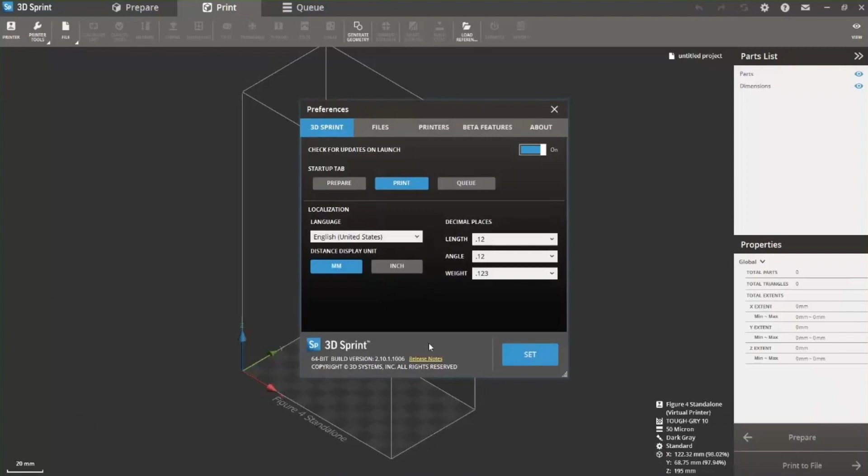That's your software version. If you ever have to make a call, your 3D Systems service representative is going to ask you what version you're using, so that's something you want to have handy. There are other defaults in here that can be set up as well.

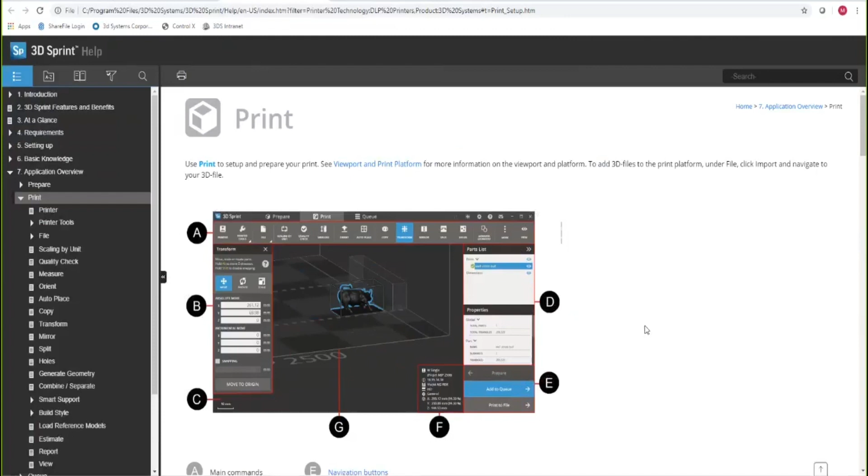Next is a question mark, and anywhere there's a question mark, I would click on it in this system. The question mark takes you to help, with quick links to help online, and it's pop-up help. So if I've got two screens, I can look at my help and still be doing things on 3D Sprint at the same time, with a couple of monitors. It's a really nice tool to not have to keep all of that in one place.

When you go in and click on that help, this particular help on the main screen in the top right, you'll see a lot of the things we're going to talk through here. This will label out and tell you navigation buttons, command panels. You can go through the commands and you'll see each one of the icons on the panel, and you'll see what they do.

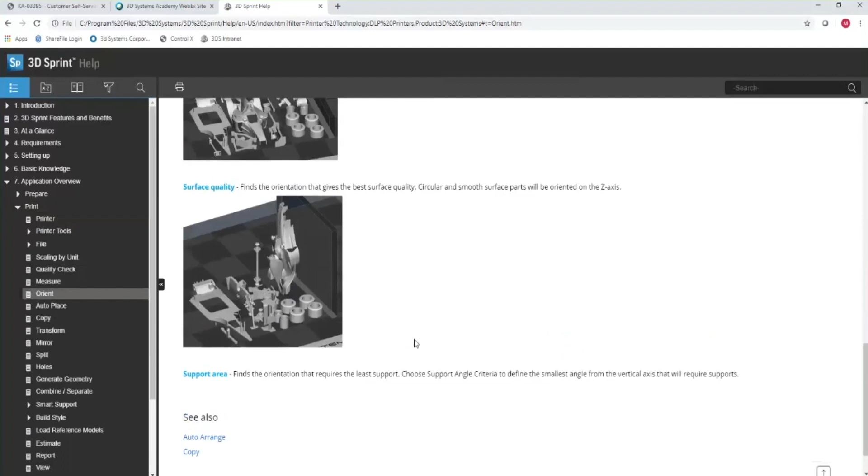For instance, if we click on Orient, there'll be a video in there of how to use that particular icon. There's going to be terms, definitions, and any other information you'll need to know what to do with that icon and what it's available for. You'll see that for just about all of the icons there, there should be some kind of help. And then there's extra information here on selecting parts, navigation tools, and things like that.

So again, this is the help button that's up on the right. A lot of useful information. If somebody's first starting out with 3D Sprint, I would suggest they click on that and just take a little stroll through and see what's available there.

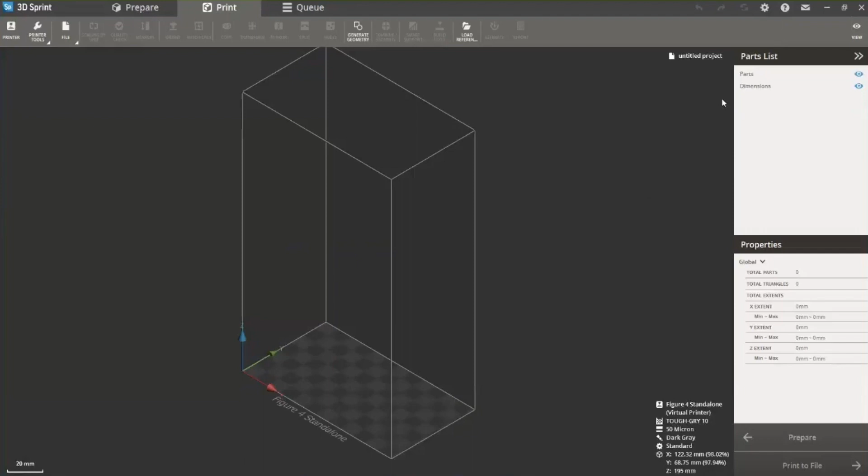The next place we're going to go is the parts list. The parts list and properties are here on the right-hand side, and let's open a part and give you an idea of what that looks like.

We'll just bring a part in here. This part's in, it's got blue on the outside. That means it's within our boundaries, we should be in pretty good shape. You see a green check mark, that means the part is verified.

We can go down to the properties. In the properties, you'll see this: the name of your part, how many triangles your part has from the STL file. You can get volume and surface area information, and also important are your extents.

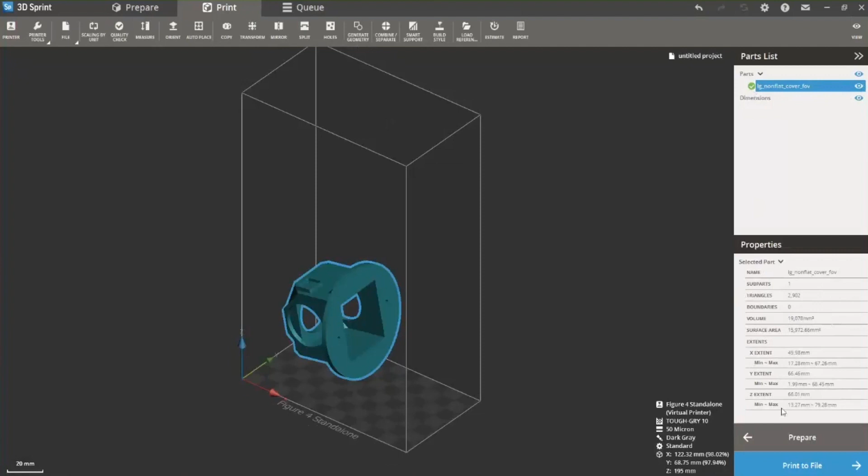Now note your Z extent, this extent starts at 13.27 millimeters. So this is telling you the extent of your part. But there's also 79.28 millimeters, which is the maximum height of this part or print in the way it's oriented right now. If you reorient that, of course, that's going to move.

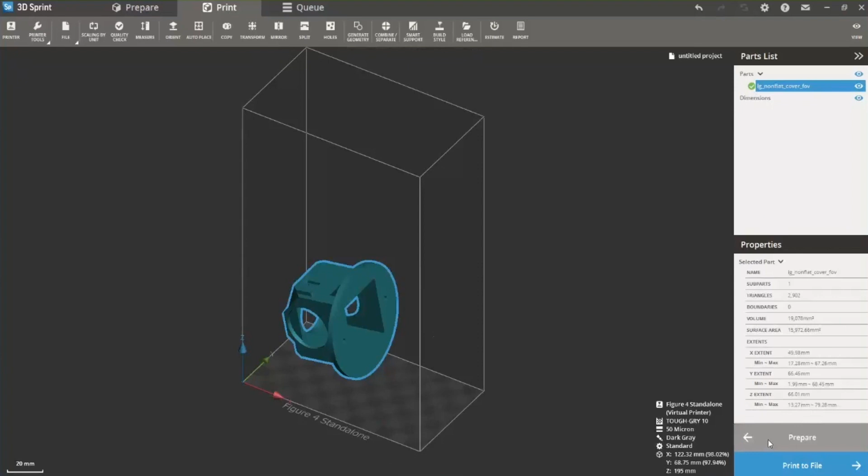Also on the bottom right, you've got your Prepare tab, where you can go to the Prepare tab. We'll go back to the Print tab, and we'll touch base on the Prepare tab in a minute so you can see where some of the functions are there. This is where you prepare your file, go print the file, slice it, and it will execute the print based on your setup.

Also at the bottom right is your active setup information. This is running a virtual printer of the Figure 4 standalone, which means I did not select a specific printer to slice my part. It's got Tough Gray 10 material selected at 50 micron layer thickness. It's in standard mode. You'll see the XYZ configuration and there's a percent here.

The reason that's not 100 is that in your default modes for each material, your setup in 3D Sprint will take into consideration your scale factors. So what that means is if you have different shrink and scale factors for different materials, you won't set your part up outside the boundary. It's going to do that adjustment for you, and it's a really nice tool to have, especially when you're putting a lot of parts on a platform.

And then we're going to go up here to the Printer tab. One thing about this Print tab, this is your main working space. I would say for a customer, this is your portal to the customer right here.

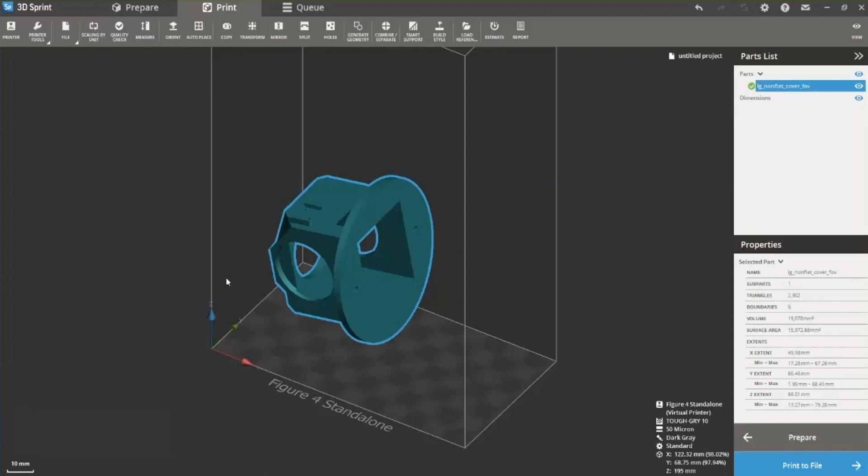You've got your help menus. This is where you're doing all your manipulation, your setup, your part handling, whatever you need to do. That's done in this particular tab.

If I go to the Printer tab, you'll see it also has a help button. If I go to the right and click on the help button, there's a video that takes you through some different things. It'll go through in detail some of the items we're going to talk about and highlight. You'll see that in the Printer tab, terms and definitions, things like that, all will be here.

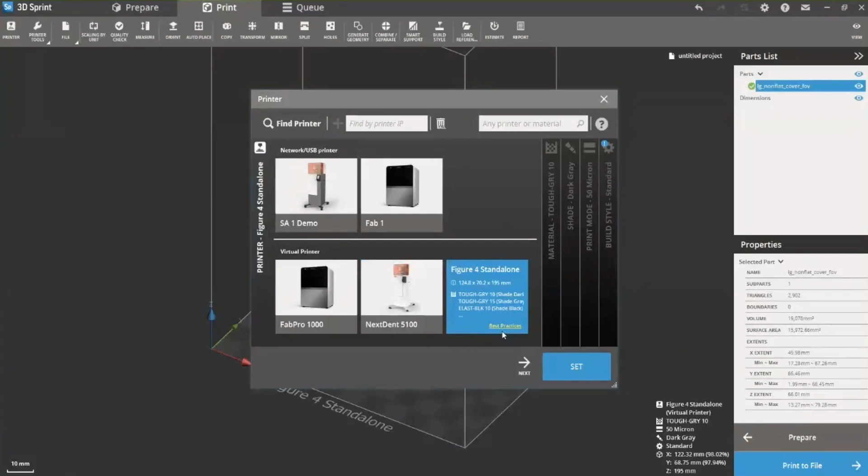Another thing in the Printer tab is there's hot links within the tab itself. When I drag my cursor over a machine, I'll see in yellow best practices. Whenever you see a highlighted best practices tab, it's worth clicking on it. For the standalone printer, I'll go here and click on this best practices, and it's going to be a hot link. This takes me to the user guide.

This takes me to a quick reference guide. There's some things on 3D Sprint. A lot of useful information at the hot links, and this is for the printer.

Once I select my printer, if I go to the material - and we talked about this before - this hot link is really going to be your friend. We'll just choose Elast Black 10 and click on the best practices hot link. It's going to take me to a table for this material, and it has all the materials for the printer in there, but it's going to go to that spot on the table and have some tips.

This one talks about using orientation to minimize large cross-sectional areas. For full platforms, print quality is best in premium mode, or slow down the interval pause time to add that to 1 or 2 seconds.

You're going to get some information here for each of these. There'll be some things, again, there's another caution about do not press down on the film when stirring for things that need to be stirred.

In addition, there's more videos that are available for best practices and how to set up parts. They'll be real similar to the things we discussed today. There's a place where you can go in - we got rejected on the link there - for our best practices that you could go in and print out, that will talk about handling cross-sectional areas and some of the things we'll discuss today as well.

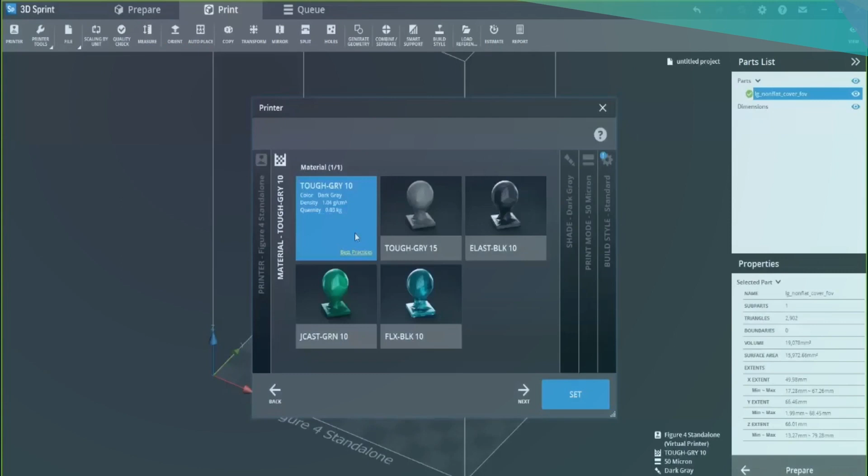And lastly, you'll have part curing time, and that will vary based on your material. The tough gray 10 suggests 60 minutes, 90 minutes for the tough gray 15, or 45 for the Elast black 10. And again, these are in the LC-3DPrint Box that we sell for curing parts. So a lot of information here, found by clicking on your best practices hot link for your material. If there are multiple colors available for that material, that will be found here.

And if you go to your print mode down here, you're going to see highlighted in yellow, it says default. What default means is a couple of things: this is the best combination we found for print quality and speed, so we try to balance those out, and that's where we start. You'll see in the build styles in a minute, there'll be other things under advanced modes, but as a start, this is what you'll see in the default. So if you see claims on print speeds, throughputs, and accuracies, they're done at the default mode that you see here.

This particular material has 10, 20, 30, 40, and 50 micron layer thicknesses. That may not be the case for all materials. The Flex Black 10, for example, is only 30, 50, and 100. So it's dependent on the material.

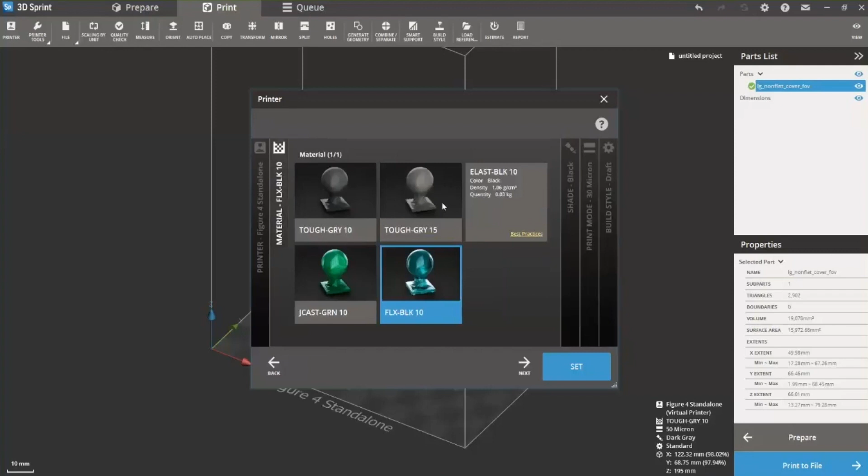Let's go back to our Tough Gray 10 and go to standard mode. Standard mode is default for your Tough Gray 10 again. Most things are set up for defaults will be in your standard mode.

Now let's talk about the difference. Most materials will have draft, standard, and premium modes. Your draft mode is, of course, going to be a high-speed mode, and it's pretty good print quality. But it's something you use when you want a fast print, just to check it out. It's a prototype - let's blast it out and see how it looks.

If I go to standard mode, that's an intermediate speed with great print quality. Again, this is where we balance speed versus print quality. If you go to premium mode, that's a moderate speed, but this is your best print quality.

The times you would use premium mode are a couple places that will help you. If you've got large cross-sectional areas, which we'll talk about more in a little bit, you'll probably want to go to premium mode because it allows your material to refresh a little bit better. If you've got a lot of different parts, say a full platform of parts that are 20 millimeter diameters, you may want to print that in premium mode as well, so you get a really good refresh rate on your material as you go through.

It just depends on your intent, your application, and what you set up. You may find that in draft, standard, or even premium, you may not see a big difference in your part. But there are cases where you'll really see the difference. Features and things like that from draft to standard, you should see a difference as well, but really want to consider that. In premium mode, again, if you have large cross-sectional areas or a really full platform, you might want to consider using premium mode.

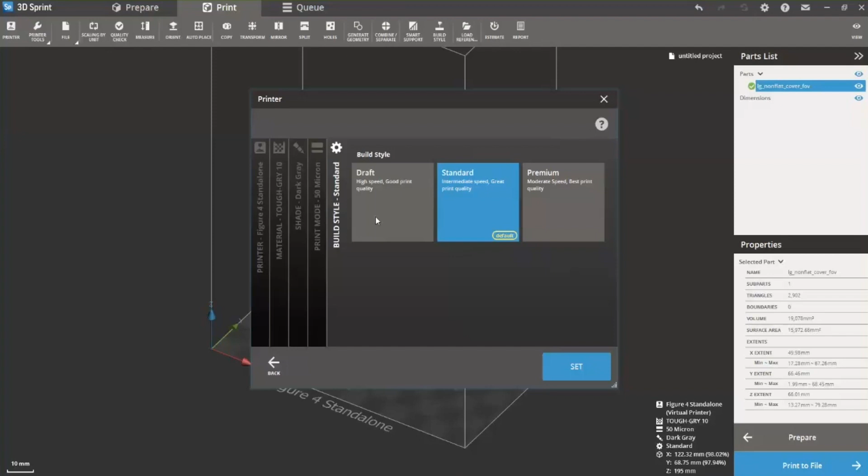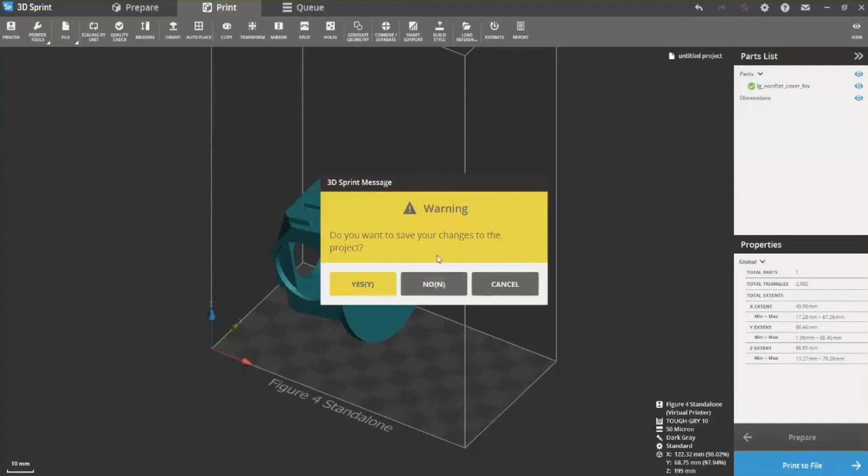So let's set that, and we'll go back up to our toolbar and go to the file. This is where you can save as, or close 3D Sprint files. You can also import and export STL files as we did, and of course you can close your part here as well. Let's just close this part. Do you want to save your changes? No, we won't save this one this time.

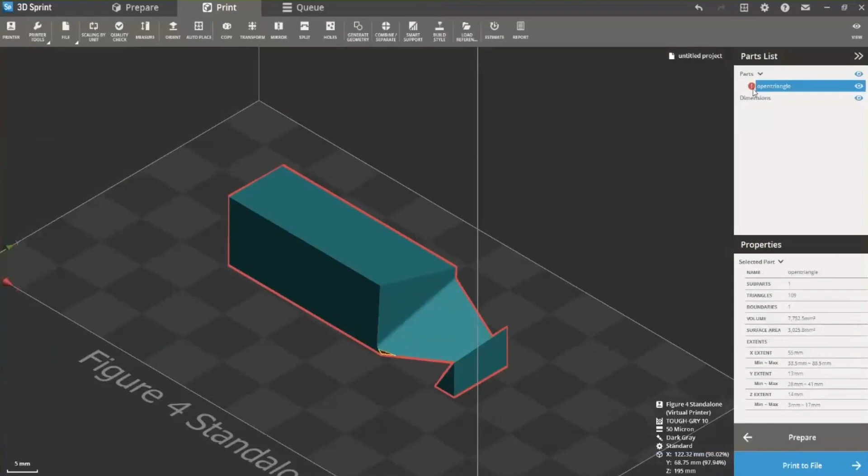Now I'm going to bring back in another part, and we'll go to auto place and set that in. Now this part is highlighted with a red border, and up here at the top right it's got an exclamation mark. If I mouse over it, it says the part contains open boundaries. So I'm going to want to fix this part before I print it, because I'm going to have some problems if I don't. Let's go to the Prepare tab, and I can already see there's a triangle missing here, highlighted in yellow. I want to try to fix that.

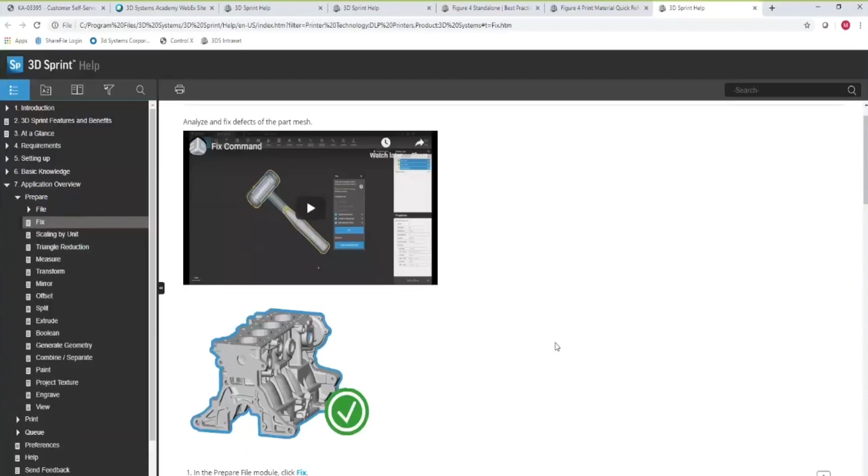So let's go to the Fix icon. The Fix icon has a question mark - if I want help on what that means, there's a video that will pop up and tell me what I see when I see purple or yellow in my part. It will give me a definition of terms and let me know everything I need to know about the Fix icon. For this particular one, there's one open boundary, and there's also some self-intersections with triangles that you can see in purple. So let's just fix that.

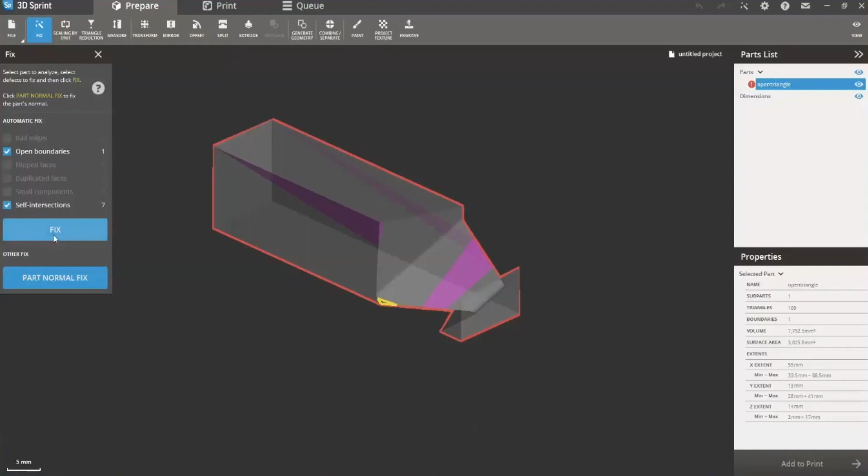You can see that was really fast because that was a really simple fix. Some parts may not have that, but if you have scan data, you're going to run into this a lot more. I would always bring a scan part in here and take that out, because a lot of times scan data will have a lot of noise shells, open boundaries, and self-intersections.

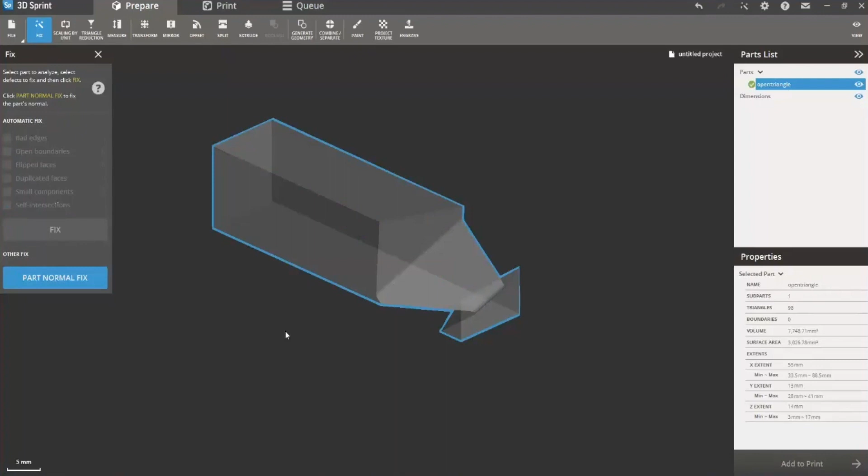So this particular part was a CAD file that just happened to have an open boundary, and you can see that it fixed that, and now it's highlighted in blue.

There's some other things you can do in the Prepare tab. You can reduce triangles, mirror, offset and split your part. You can extrude geometry out of your part, and you can generate geometry and add it here.

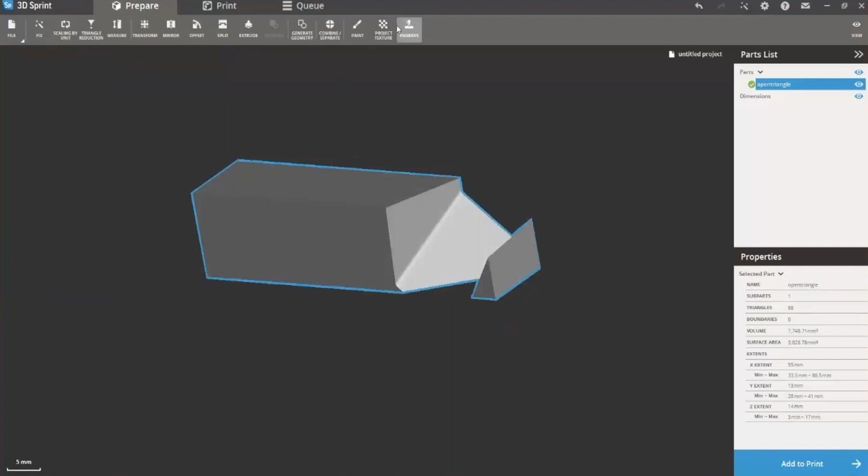But one of the things I really like about the Prepare tab is if I'm doing multiple parts - let's say I want to print 10 of these parts at the same time and I want to know where they are - then I'm going to want to engrave that part and set it up such that I know which one was printed where on my print layout. So let's do a view and choose this from the top.

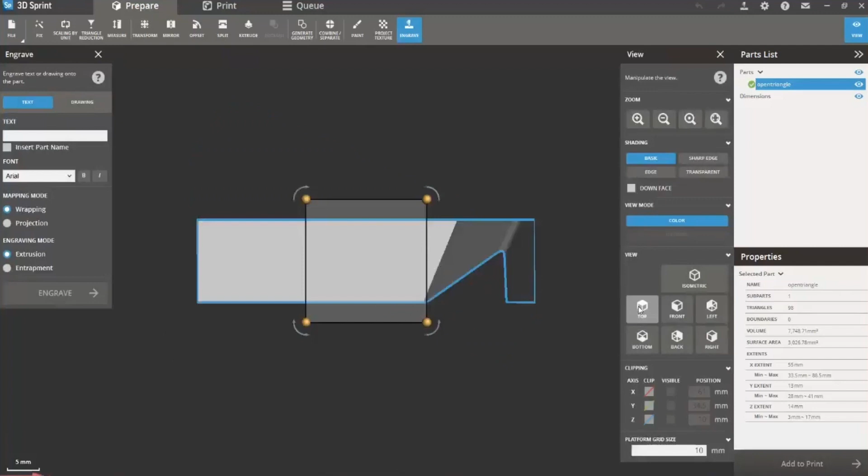And I'm going to choose the plane I want to do the engraving on. My window's a little big, so let's shorten that up here, and we'll go into the text and just say part 1.

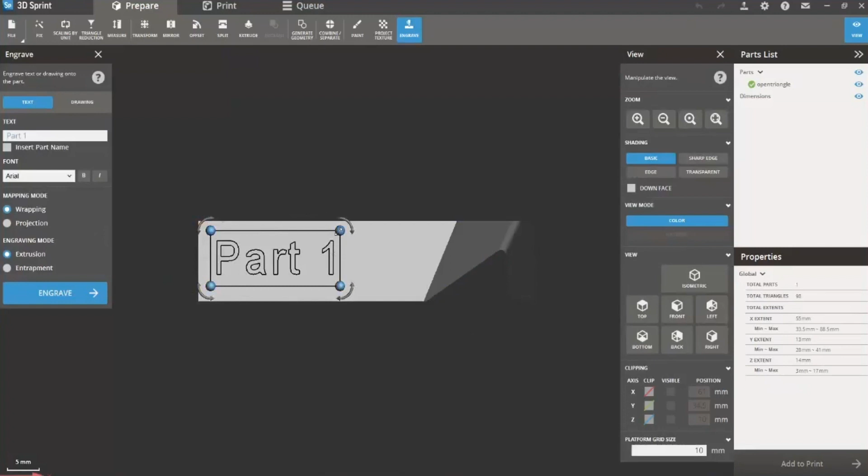I'm going to have to move that over a little bit because it came off my part. That looks good, I think I like the font size - I'm good with that. If I want the font smaller, I can simply make my window smaller, and that will help me decide how big to make my font. So it's a nice automatic feature to have.

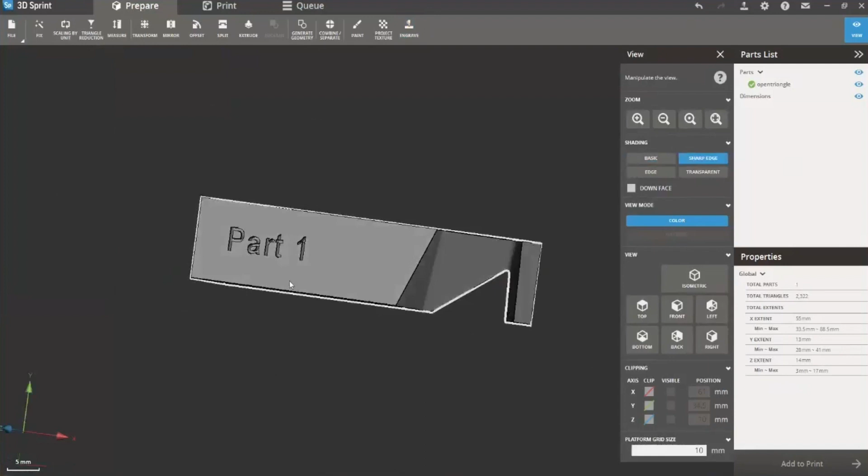And so I've got that set up. I want to engrave this, so let's just hit engrave and apply it. I'm going to close here and rotate this over. We'll hit the sharp edge where you can see now we've got an engraved part.

You can control the depth and things like that, but there are a lot of features here you can use to manipulate your part. This is one I just want to highlight because we use it quite a bit. And then once you're done, you can just add that to your print.

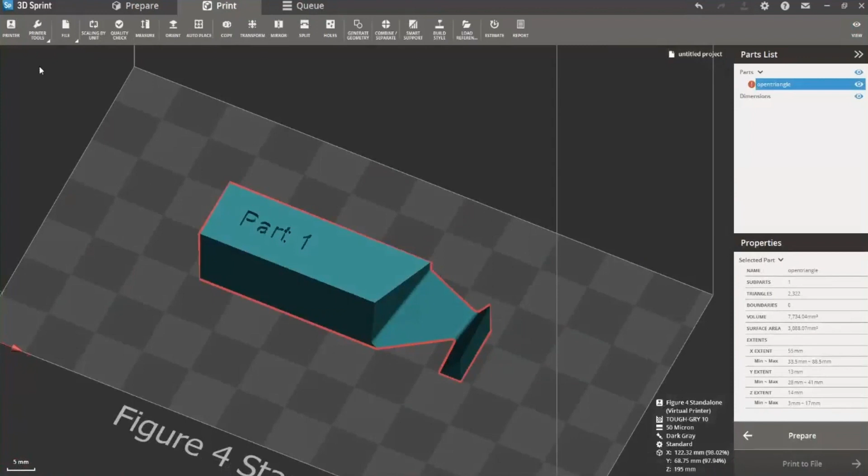It's coming in red because it's beneath where we generally have set up in the build style. So I can go to auto place, set, and you can see we're red, blue around the outside again, and ready to print. And then lastly, the Queue tab.

This is where, if we slice a file, we'll keep things in the Queue tab. We can add files here. We can do some different things in the Queue tab, and we'll touch on that as we slice prints and move forward.

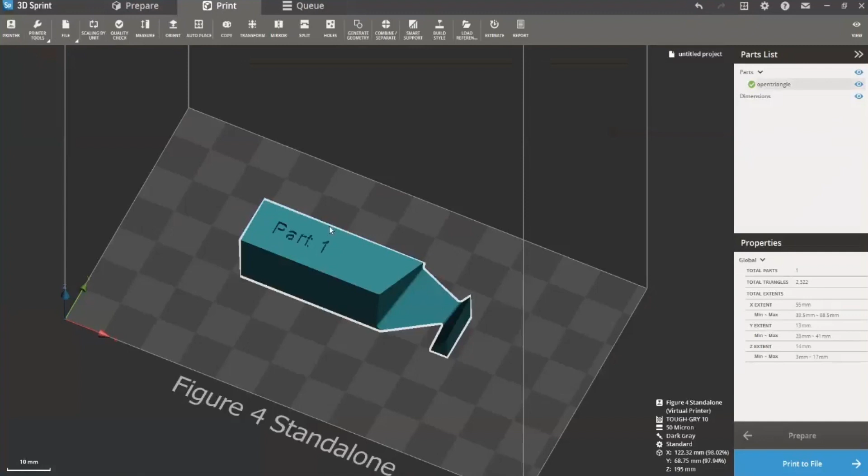So let's go in and look at some of the other buttons we have here, set up a part that we want, move around and see what our intent is. So let's go back - we'll close this.

Do I want to save? I won't save those changes this time - normally I would - but let's take our import and let's bring this file back.

So again, the first thing I want to do is bring this part in and identify the intent and application of the part. And as I mentioned before, it looks like we've got a datum surface here.

I want that to be pretty flat. I've got screw holes that come in the top, I've got 3 different larger holes where I'm going to bring tubes in as a junction, and I've got a sensor in the bottom. So to get this started, let me just take this - we're going to use the Orient function.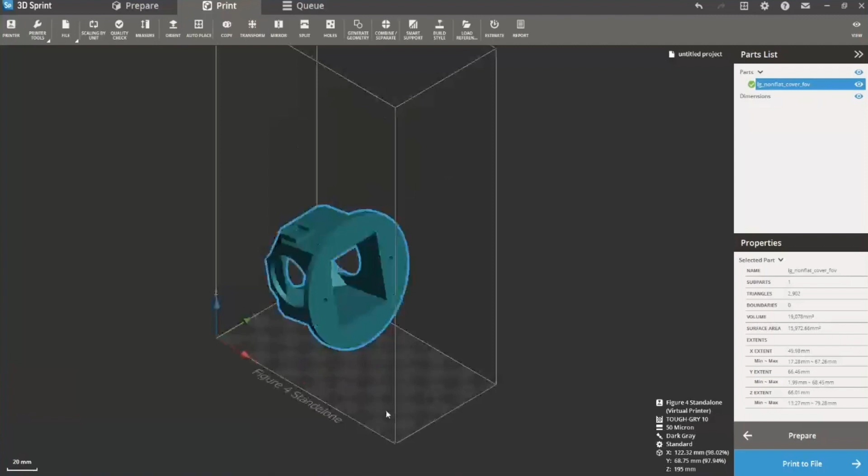We'll go to manual, let's set this flat where we can really take a look at it, and let's view this from the top.

Now one thing you can do with your transform button, and we're going to use this quite a bit here - let's just center this in the system here, and let's take a look at this part.

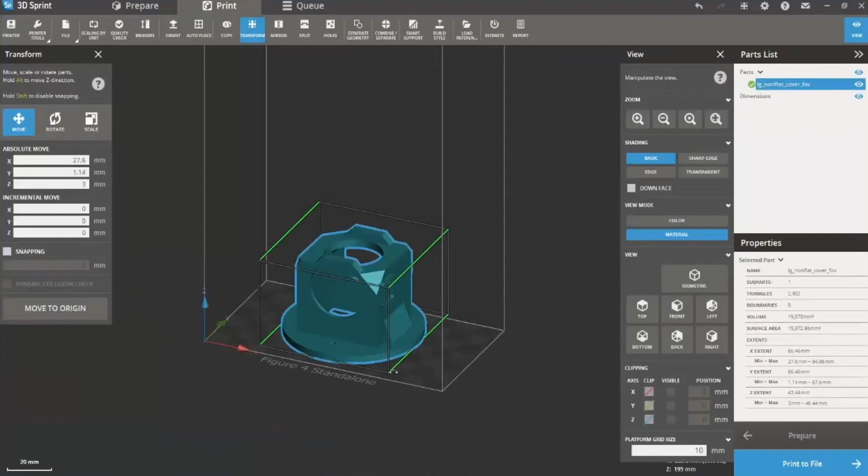Now one of the things I really want to stress when you're using your Figure 4 - this is the Figure 4, this is the Modular, even the Fab Pro setup - you really want to limit your cross-sectional area. That is one of the first things you'll get from a successful part build.

And so one of the ways to do that is I'm going to go over here and turn on my clipping, and I want to choose Z.

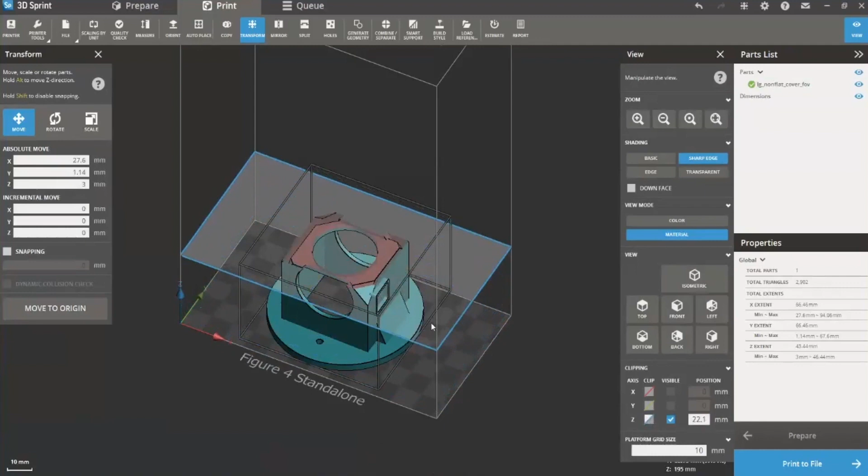And you can see my part's gone, but I've got this blue XY plane around the bottom. So if I start to move that up gradually, you'll see this larger cross-sectional area in red. I'm just going to move this on up and you'll see it get smaller, then go up and it gets a little bigger, then small again.

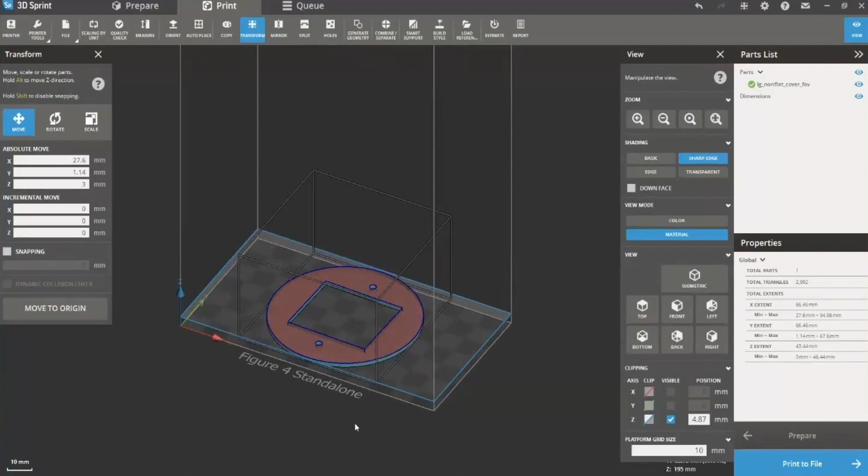If I want a really nice looking part, I want to try to get rid of this big cross-sectional area. There's a couple of things. When you deal with materials, one of the things you have to deal with is differential shrink. We are using membrane printing, so I want to be able to get the same refresh rate all the way through my part when I'm printing with my material.

So what I'm going to need to do is rotate this part. But I just don't want to rotate it blindly. One thing I know is we talked about the intent of the application. We've got this larger cross-sectional area, so let's set this up such that we can optimize on that.

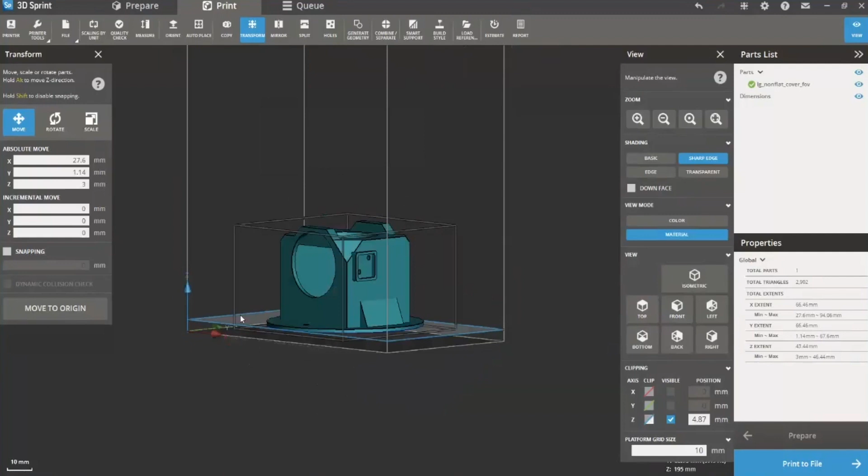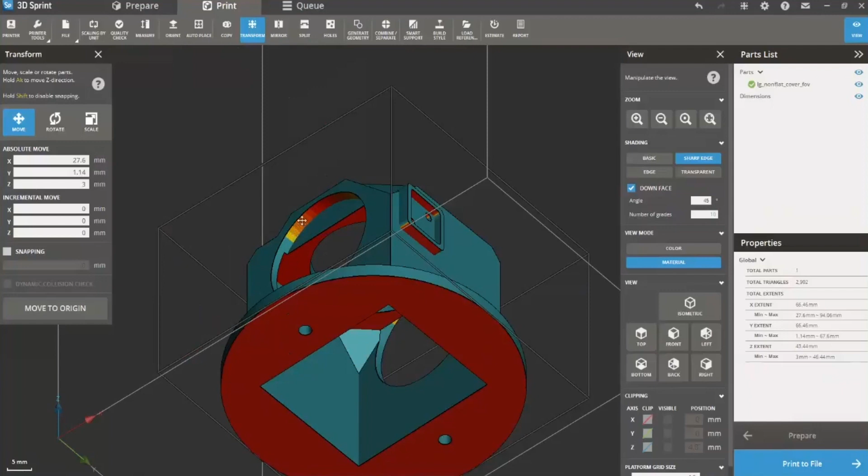One of the first things I'm going to do, let's turn the clipping back off for now. I'm going to click over here on the right on my down facing. I'll leave the angle at 45 and let's set the number of grades to 10. When I turn that over, what I see is it's highlighting my down facing surfaces in red, and you can see there's a gradient here that it's not a 90-degree down facing, but it will check it up to 45 degrees relative to my XY plane. So I can see where I may or may not want to have supports.

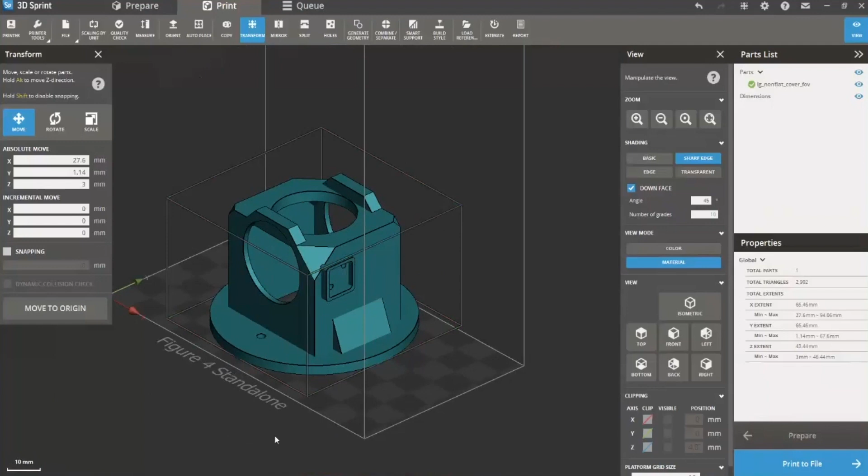One of the things we talked about when we set our part up is we've got the datum at the bottom, we've got the holes in the top, we've got the tubes coming in the sides, but one of the things we really want to maintain is the integrity of where our sensor is going to fit into these features. That way our sensor will work properly.

So what I'm going to do is go in here to my transform, and let's just start by rolling this back. That'll help us with this cross-sectional area a little bit. And you can already go in and see a lot of that red's gone. So we got rid of our straight down facing surfaces, and we're a lot more self-supporting in what we do.

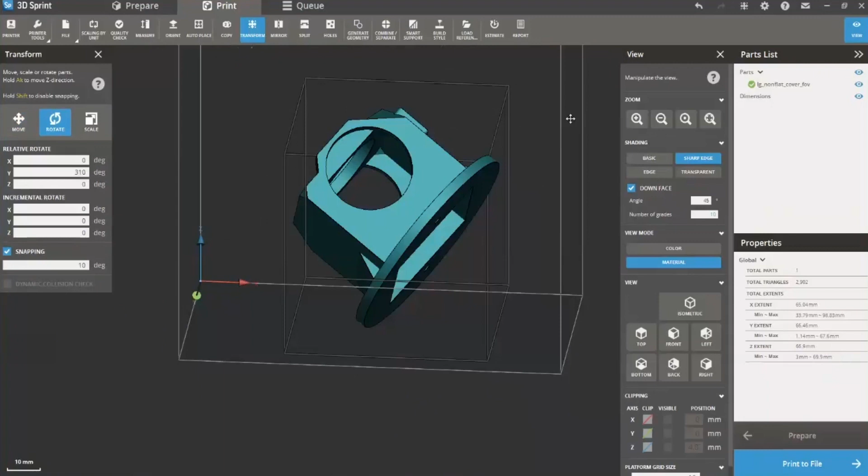And so I don't like being over that far. Let's come back just a little bit. One thing I'll show you is if you go to your snapping, it's set at 10 degrees. I'm going to set that at 1, where I have a little more granularity in how I move that. Now that I've set that up, that's going to help me with my cross-sectional area.

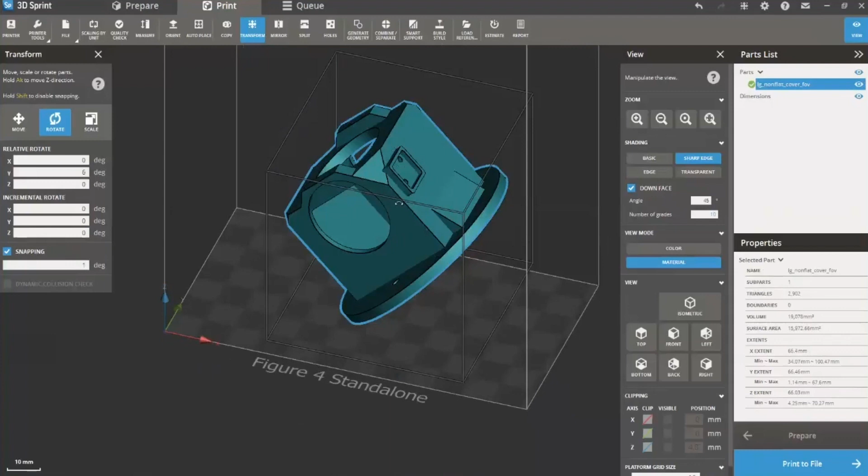Another place I can optimize, and the reason I rotated it in that direction also is because I've got these features that I want to maintain. The fewer supports and fewer things I have to do to these features, the more accurate and the better integrity of these are going to be, because they're not going to need a lot of sanding or any kind of post-process. So I want to put these on top.

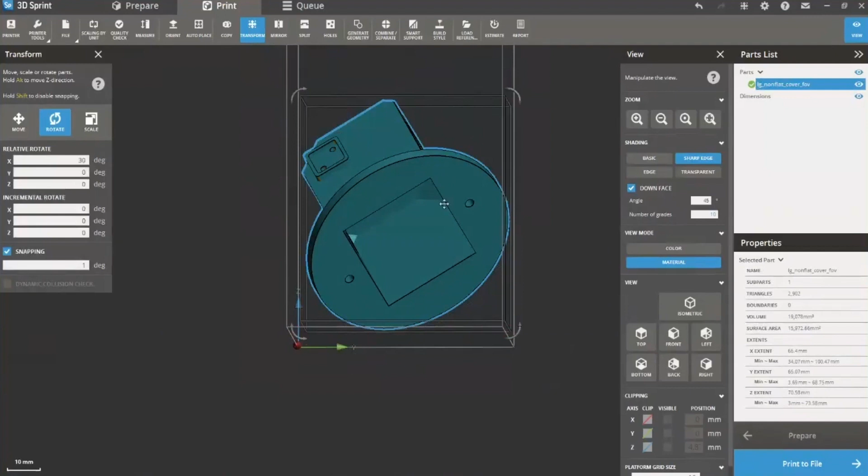And now I want to go down here and see, well, I've got a square opening, but I could actually take this and let's rotate this part. Let's grab a little bit. And now I'm making these self-supporting as I go through the bottom. So that's going to help me get a good square bottom, and my opening there will be pretty good. I'm looking at my part.

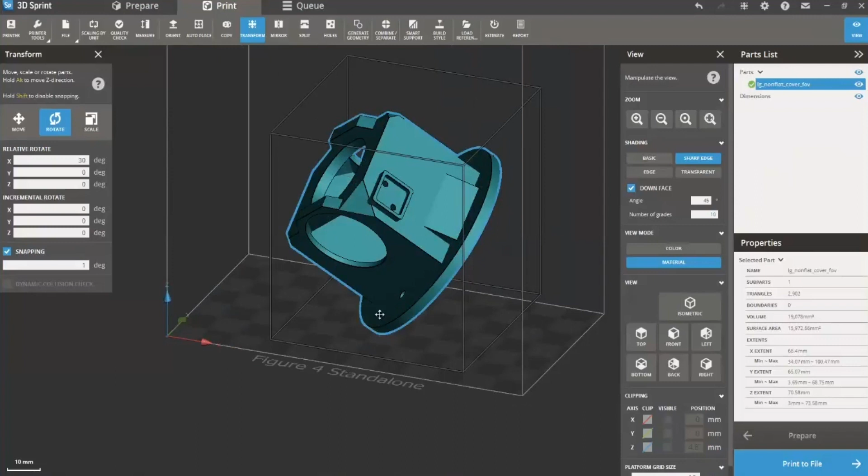The other thing I'm going to get here, and I really want to stress this, is my cross-sectional area. Now, I used to do a lot of injection molding for about 15 years on different parts, large parts, small parts. And one of the rules that we tried to guide things by in the design is to try to get uniform wall thickness.

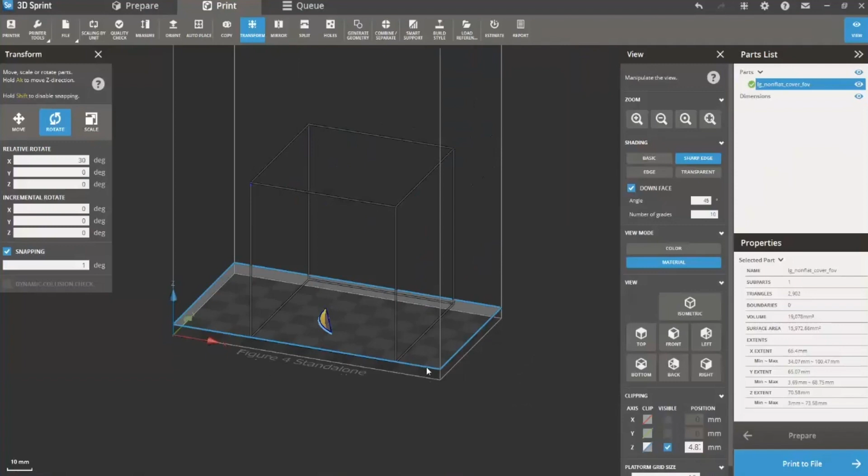Because if you get uniform wall thickness, then you're seeing the same kind of properties, and the same kind of heat, the same kind of flow all the way through your part.

And that applies to what we're doing here as well. If I look at trying to get a uniform wall thickness, going up through this part I don't have any of these big flats. That's probably my biggest area there, which I could rotate out of if I really wanted to.

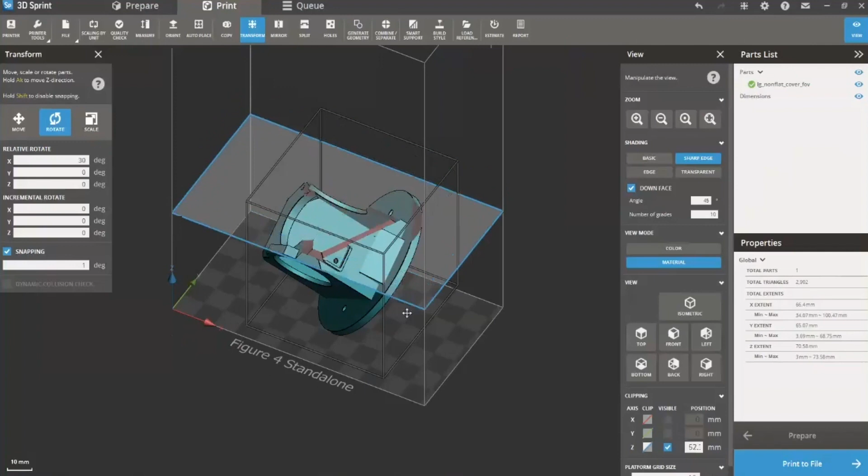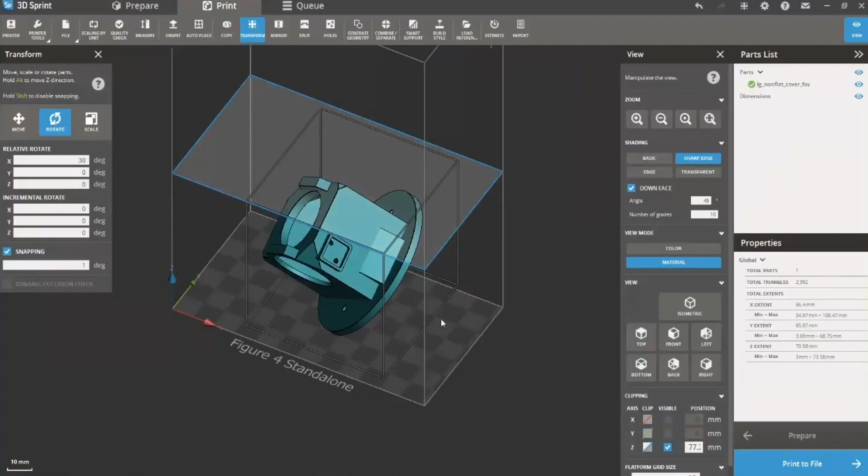But I already know we can probably print that pretty well. I'll check my part to see if I'm mostly in a uniform wall thickness situation. Of course, every geometry won't get this, so I'm considering the intent and application of my part, what features I need to preserve, how to minimize the cross-sectional area, and how to maximize my time if that's a part for printing.

This is not something where I'll simply load an STL, put supports on it, hit print, and it's going to give me what I want. I really need to consider what I'm doing when I go through this, so I'd like to reach success as soon as possible when I start my part.

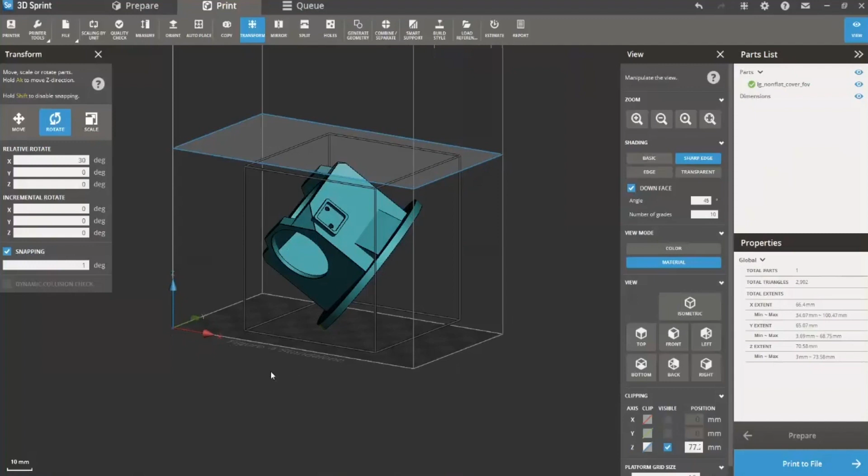If I consider that up front—this is one of the real reasons we're setting up these modules, so I can teach people how to get in your lab what I get in mine. When I set this up, how do I get success early? I get success by considering things like this and setting my part up from the beginning with an idea of what I want it to look like in the end, and why.

So once I get that set up, we can go in and put supports on this. Let's close this, and we'll go in and take our smart supports.

In your supports, there's a couple of things I want to touch on. When I open the support window, I see it in yellow. This one says must watch, so I can't give up on that—must watch best practices. I'm going to click on that.

What's really nice here is there are a lot of videos that have been put in with these best practices. We've added things in, so there's a training course here with more video information, and more best practice videos. There's actually, in this system, an application guide for people doing jewelry.

I'll say jewelry supports will always be manual, because jewelry has so much intricate geometry. This isn't something where you'd hit a default and start printing your jewelry. If you're doing jewelry, I highly suggest looking at this video—there are sample rings and things you can look at for using jewelry in that application. That information is available when I go to the best practices here.

In addition, there's a question mark—I'll hit that for help. I can go through that icon and see where anchor points are, and how things are set up in 3D Sprint.

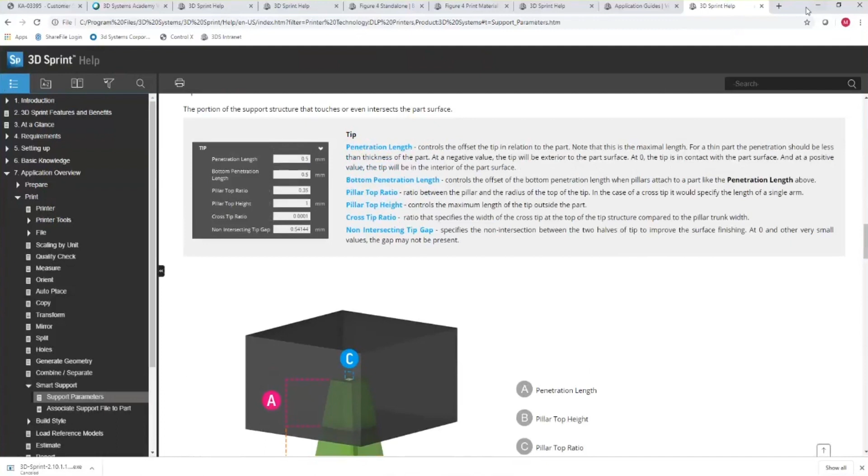If I go to the bottom, I can hit my other support parameters. This will guide me through what these other terms mean in my support settings, how they're affected, and how that can help me improve my part.

For materials in 3D Sprint, this was Tough Gray 10, it's got three different default supports: a fine flat tip, a general flat tip, and a general round tip. General round tip is normally for more robust parts, things that are really thick that might be more susceptible to warp.

Fine flat tip, if you've got a really larger surface—say a big cover part—that you want to maintain a flat surface area, gives you more and denser supports, but with a finer tip to make cleanup easy, while still getting full coverage.

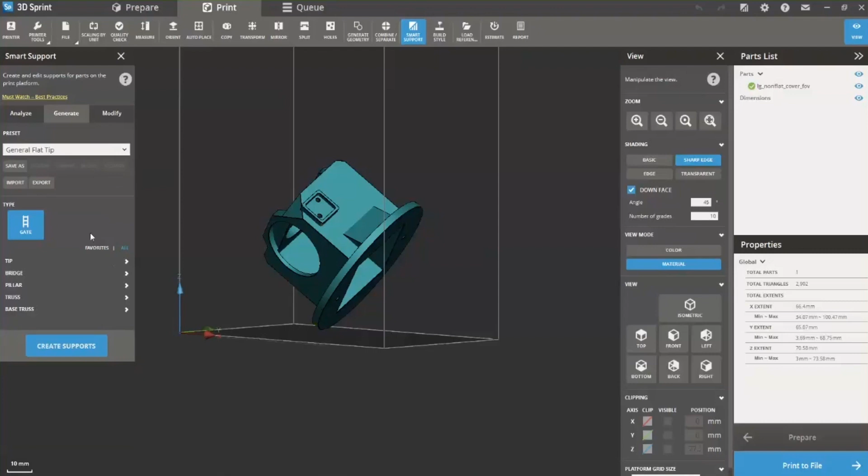General flat tip is as it is. That would be our default setting most of the time. Under each one of these parameters is another set of adjustable parameters, listed in the help section. We won't go through each of these now—that's in module 4, where we'll cover it in more detail. But let's go ahead and create supports here.

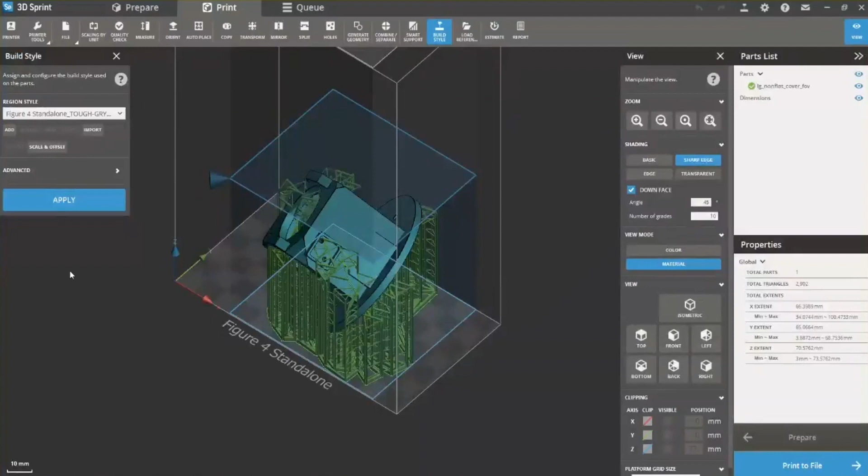Once you have your supports on your part, you can go over to your build style. Your build style also has a help button that will walk you through it. I know I'm redundant pointing to that help button, but I want to reiterate there's a lot of help available in 3D Sprint—lots of videos and downloadable resources to answer your questions. You should never be stuck, at least most of the time. I don't like to say never.

But under here you've got your build styles, and here you see draft, premium, and standard. You can add build styles, and you can also go down into advanced mode, which has another list of parameters you can manipulate.

You've got your base layer, which has a base layer curing time. A lot of these parameters, if you have any adhesion issues, you can turn your base layer cure time up about 5 seconds to see if you can improve adhesion, or add 2 or 3 base cure layers. That helps adhesion if you're outside tolerances on some of your other hardware. This gives you a few more options within the system, and if you make a change, you can save it.

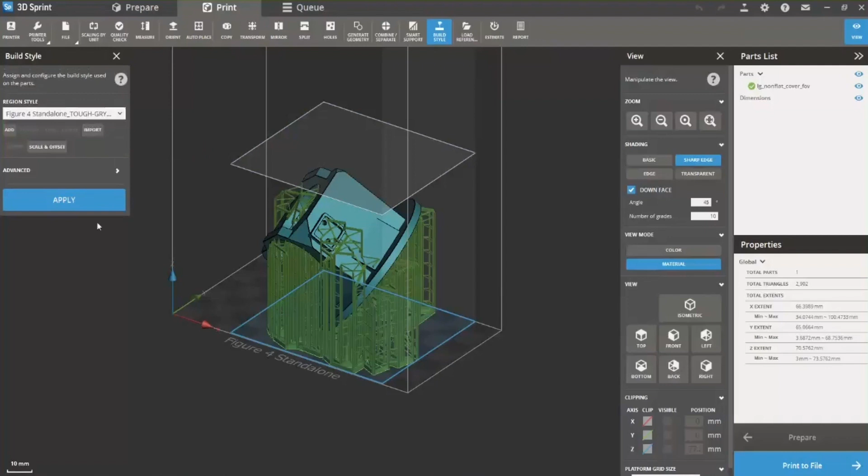So once we're here, we chose standard mode and applied it. I'll close my view and go click on print style. We'll save our print style to my training folder. Again, this is a .pxl file—if it were modular, it would say .f4x. We'll save this.

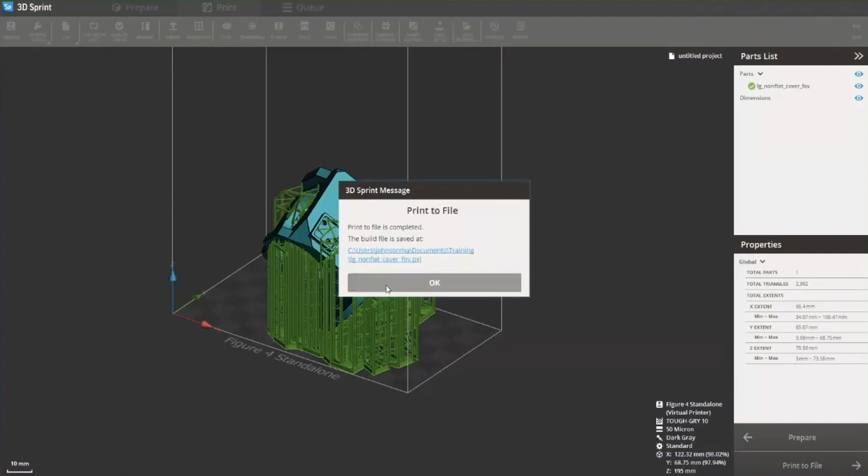My file is sliced, and it tells me where it's located if I need to go get it. I'm going to go to my queue and add the file there. I'll browse—there's the file we just sliced. We'll open that and add it to the queue. Now my file's in the queue, and it updates to show my file there. I can have multiple files in the queue, and they can be moved from top to bottom and manipulated from there.

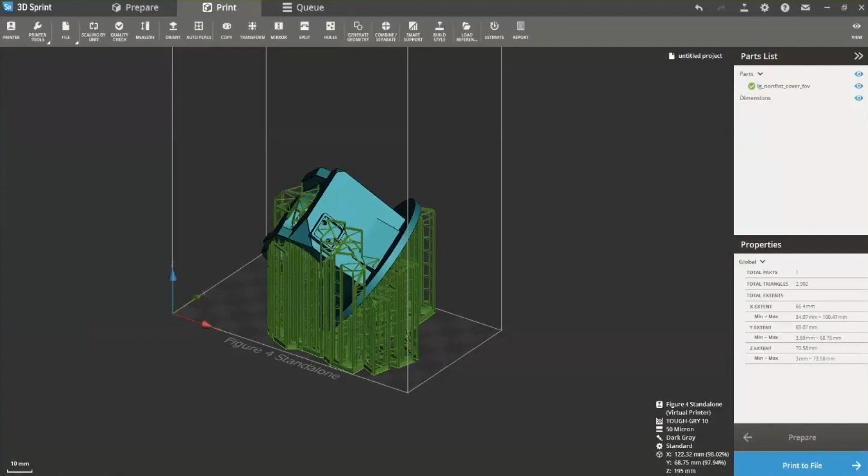One thing I want to go back and address: there are some things in 3D Sprint and Figure 4 printing that are going to be problematic. I want to be sure you're aware of what those are, what kind of parts cause issues, and what that looks like.

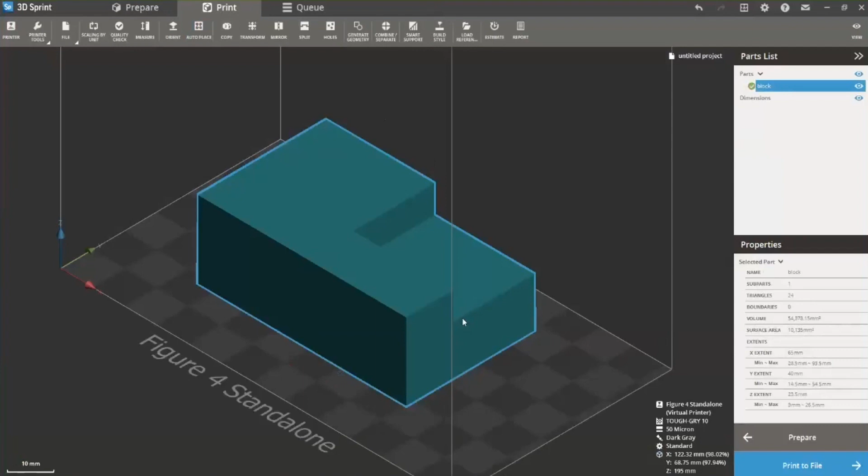One of the things I'll show is this part I'm going to import. Let's go ahead and auto place that. One of the challenges you encounter in this kind of printing is big, blocky parts. In Figure 4, this is one of the more challenging types of hardware. Rather than tell you this will print everything, I wouldn't do that to anybody—this is something that's going to struggle.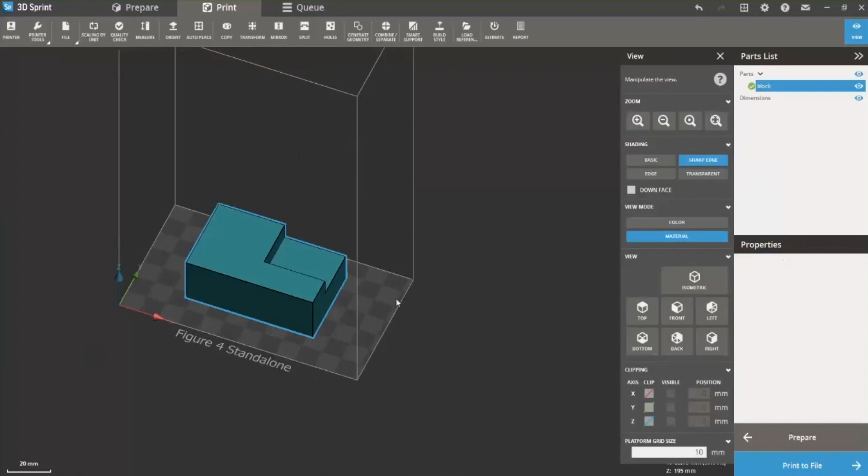So I look at the intent of this part, and it looks like some kind of locating block that I can put down to locate features, or some kind of jig. But when I look at the cross-sectional area of this part, that's huge, and that's really going to struggle to print in 3D Sprint.

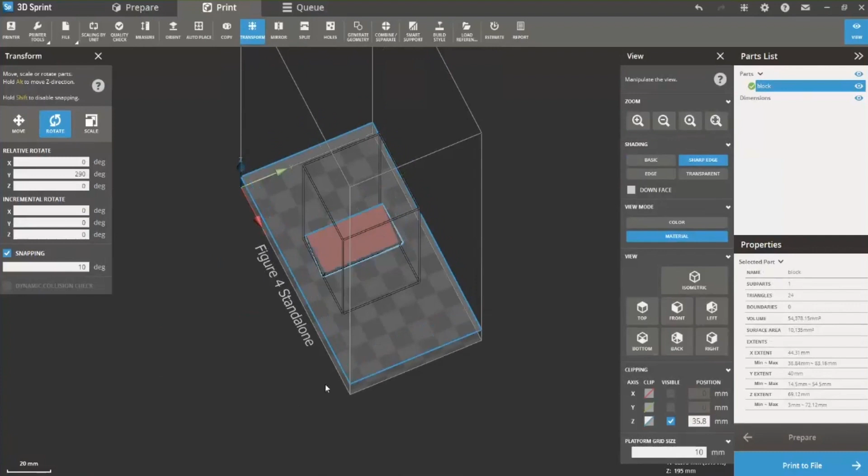So one of the things I can do is go to my transform. I can look at this, and we could transform this and turn it. That's still a big cross-sectional area. We can go back and do a compound, and we still got a big cross-sectional area. So this part is really going to struggle.

To be able to print on the Figure 4. And let me tell you this, going back to injection molding, I would not injection mold this part because you're going to get a lot of part sink and it's going to affect your accuracy.

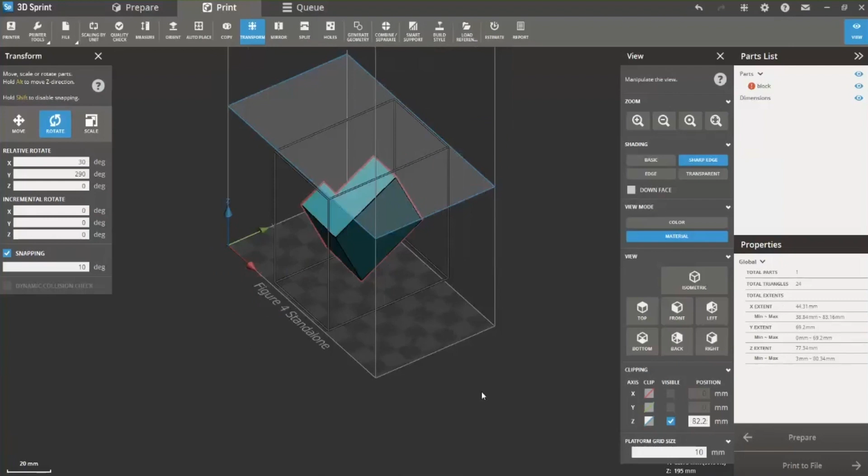So if I know the intent of my part, and the intent here was that I want to use this as a locating feature, then what I would probably do is come into the back of this part and core this out and put some ribs in here to maintain the structural integrity, and then be able to get a more uniform cross-sectional area in some kind of compound angle setup such as this.

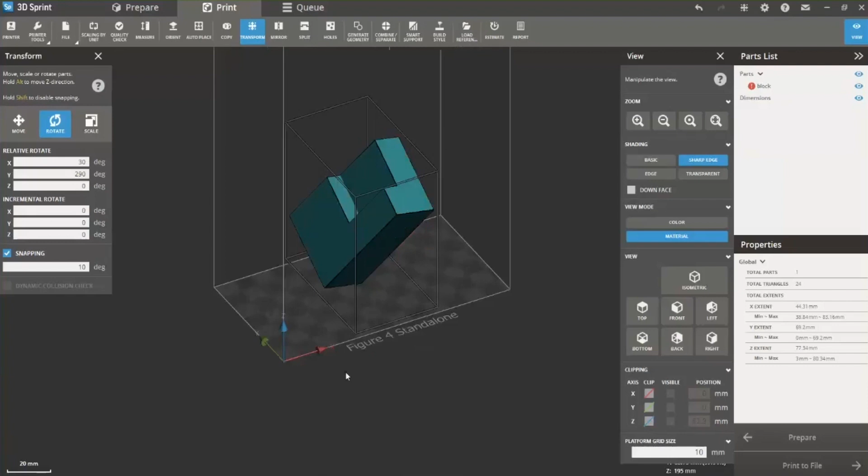So I really want to stress that if you've got really big cross-sections, you need to take a step back and look at whether this technology is going to struggle with it as it is. So what's the intent and application of my part, and how can I alleviate that in the design? I just want to touch on that.

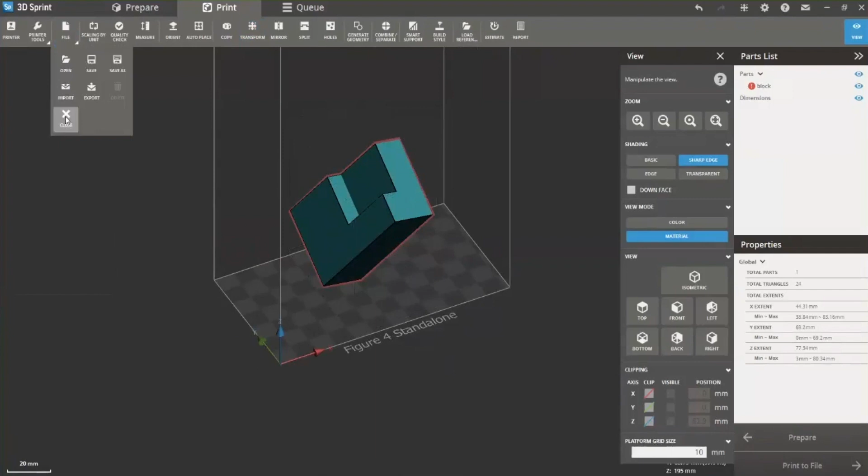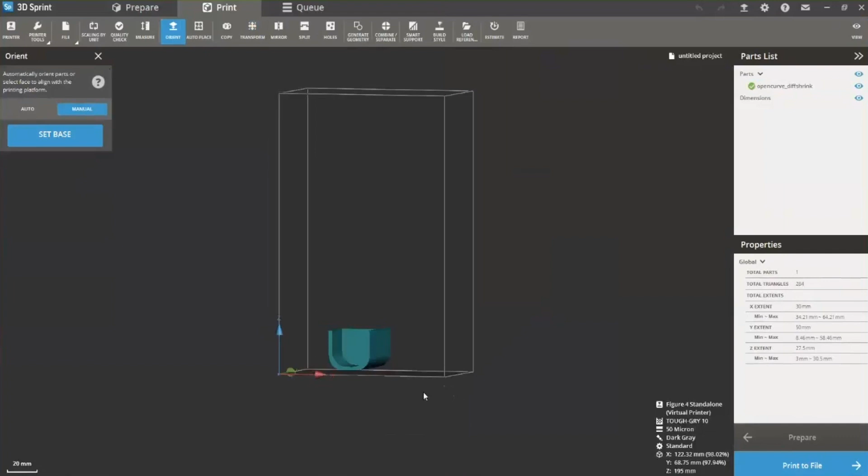There's another type of part that you'll run into issues with on the Figure 4. Let's transform and move this one around a little bit. We'll go to our Orient and set this up.

Now this particular part, as you can see, it looks mostly uniform, but if I go in here and start looking at what my cross-sectional area is, it looks pretty good there. Then all of a sudden, wow, that's going to be a problem.

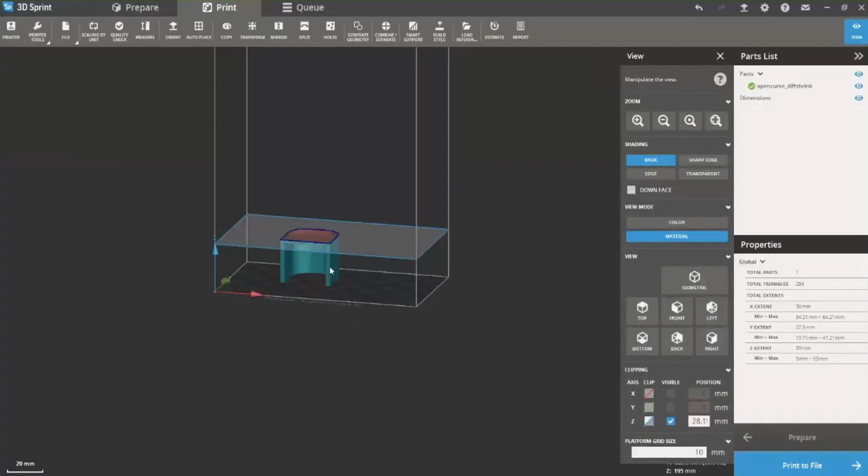And if I rotate this, it could still be an issue, I could probably rotate this to get mostly out of it. But one of the things I want to be considering, if I look at it in this orientation, is differential shrink. And we'll talk about that a lot in additive manufacturing.

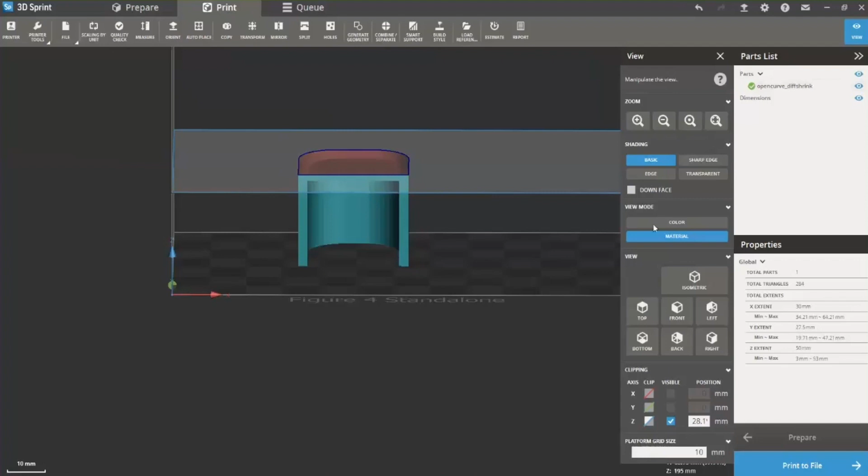One of the things you'll see is, let's say this particular material has a 1.5% shrink. I'm not sure exactly what it is offhand, but let's say it's 1.5%. Well, if all I'm printing is this section down here, then I'm not going to have a lot of difference in how this shrinks. I'm not going to see that very much.

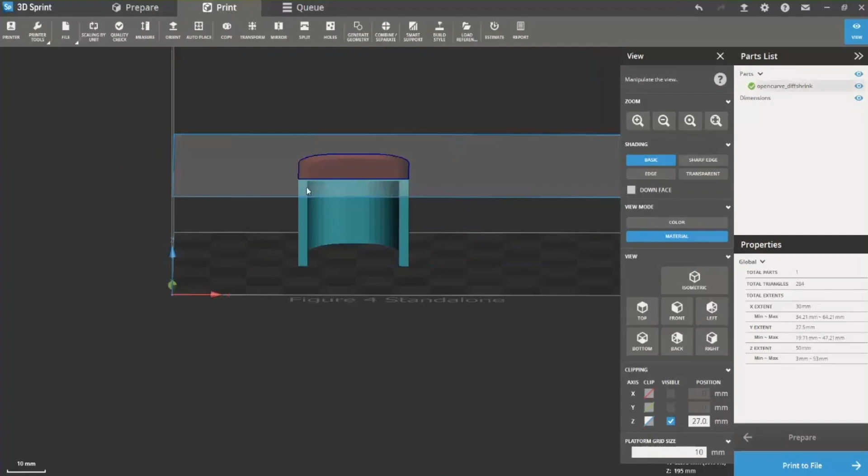But if I'm going up and up and up, and all of a sudden I get to a layer where it starts this, wow, 1.5% of this is really going to make a difference. It's going to come in a little bit. What you'll see is your part will come up, and it's going to come in this way. So you'll have the bottom pulling at the center, and it's going to have that shrinkage. Then it's going to get out of it, and you're going to bow back out. So you're going to have kind of a shape like this in your part.

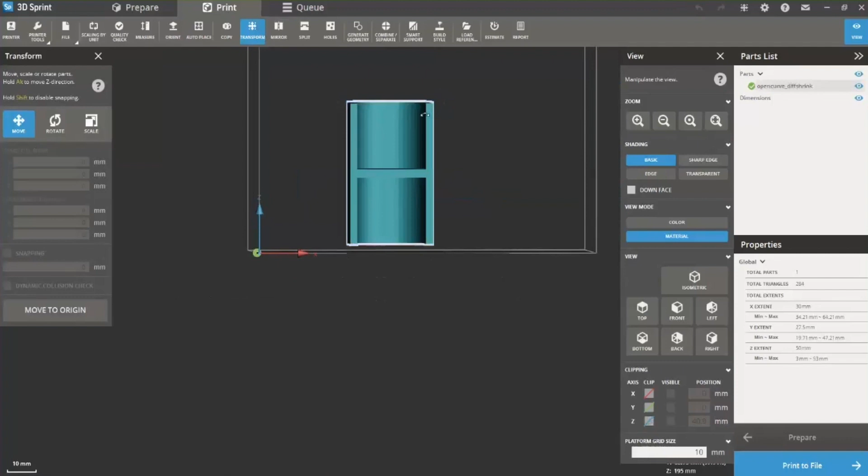So one thing you want to really be able to do when you're doing this is go in and look at the orientation of your part and see, can you orient out of anything to get a more uniform wall thickness? That's a lot better there, and you're going to see a little bit less differential shrink in this particular part.

Now, differential shrink is a material property, and some materials will have more than others. But the advantage of understanding the intent and application of your part and understanding how the Figure 4 system works is you can set it up to minimize what you may or may not see in that situation. So it's something to consider in your part setup that's really important, and I wanted to be sure to highlight that.

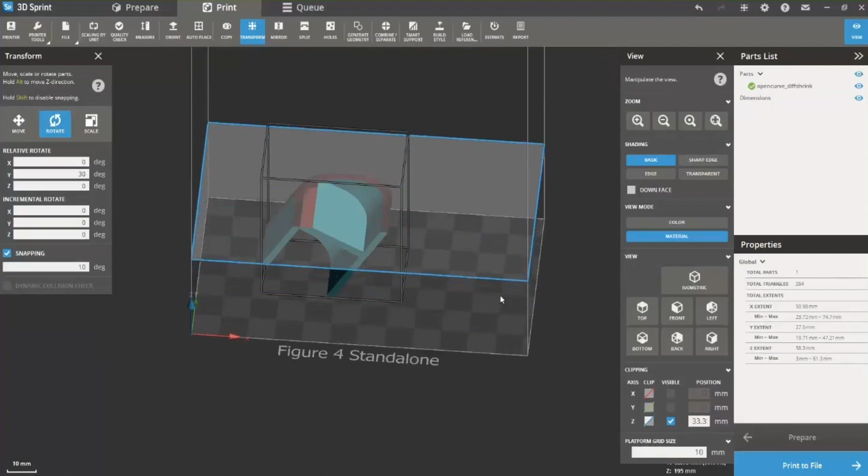All right, well, that concludes all the information I have for Module 2. Again, as we go forward, you'll see us doing the other modules, and we'll go in much more detail in the next module for building parts and the advanced styles and supports, and then we'll add on to that as we do combination parts and things like that as we go forward.

So I really hope that you were able to grasp the understanding of the basic 3D Sprint toolkit, all the help that's available, where the hot links are, and some of the things to pay attention to. There's a lot of information we went through here today, but a lot of it is redundant, and you'll be able to go back and find that, as well as come back and watch the video, and you can see where we pointed some of these things out.